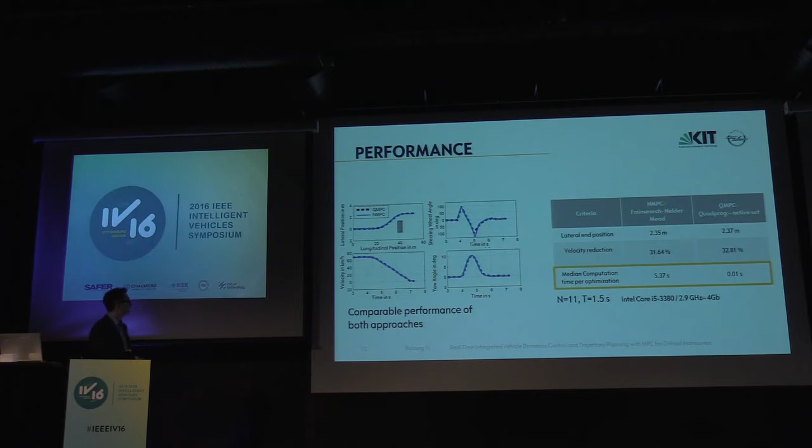For the ideal formulation MPC, we have 5 seconds per optimization step, which is not real-time applicable. And for the approximative MPC, we have 10 milliseconds with the hardware I gave here. So this is only simulation here. Next step we are about to do this in real time on a test vehicle, but I have not prepared results here. So now I prepared some videos to demonstrate the performance in a simulation environment.

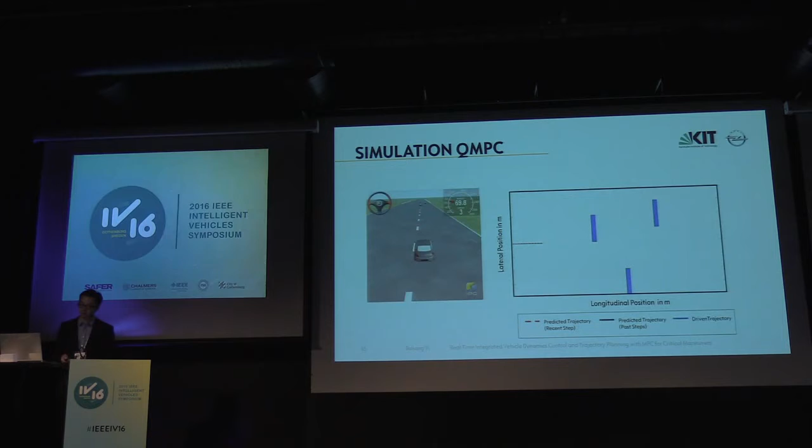We can see that we try to brake the system to zero velocity, and I hope you saw this obstacle also. And then I have another video prepared where I extended this algorithm for another scenario where we have 3 obstacles, and this example is just to show that we can extend this algorithm very easily for other maneuvers. In this maneuver, I removed the velocity cost function so that it does not brake.

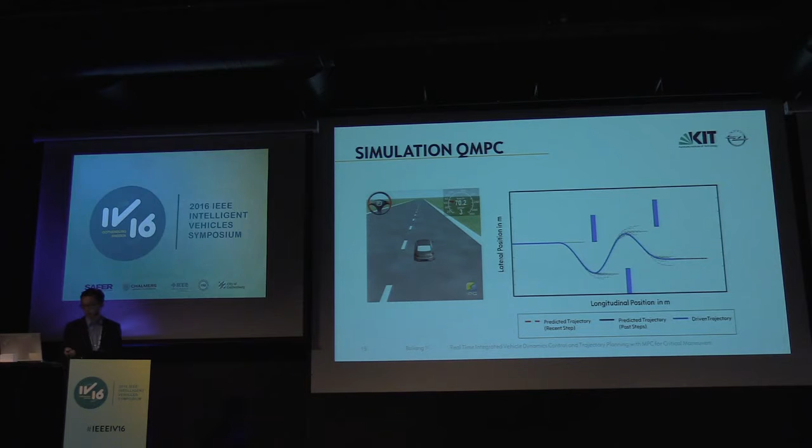And we can see that here on the right we have the predicted trajectories for each position, for each time step, and the driven trajectory, as well as the predicted trajectory for each previous step. We see that at the time when the prediction horizon gets a new obstacle, we replan the trajectory and catch another trajectory, so that we can handle dynamic scenarios, which was one of the motivations of integrated control and planning.

Now coming to my last slide, what I have shown here is a method for integrated vehicle dynamics control and trajectory planning by combined braking and steering. I showed two versions of it. First, the ideal MPC formulation with non-linear optimization, where the advantage was to generate trajectories considering vehicle dynamics, which is able to adapt to dynamic scenarios during the maneuver. We have less tuning of control parameters.

And the next version I showed, this approximative MPC, where I showed how we can do this with comparable performance, but with extremely reduced computational cost. And it shows potential for real-time application. The next steps are to apply it in a test vehicle and to show that it's really real-time applicable, and also to compare it with the classical state-of-the-art trajectory planning and control concepts, and see how it compares.

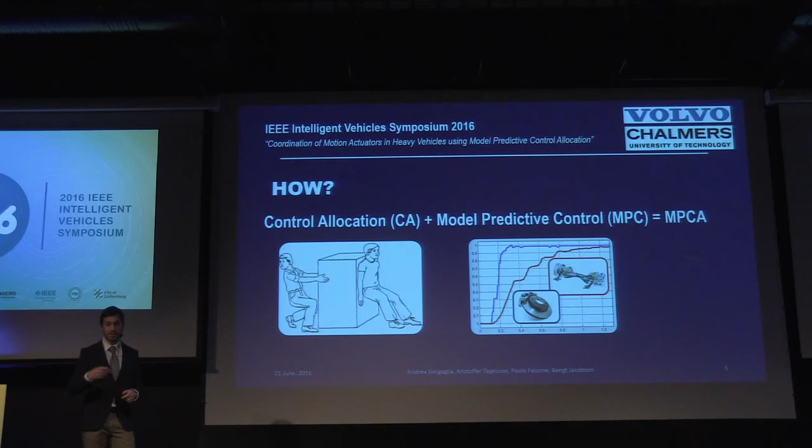As we want to control different motion actuators, we have to include the dynamics of the actuators in the control, and so we borrowed an idea from model predictive control. That is, we introduced a model for each one of the actuators in the control allocation formulation, in the constraints in particular, and we added a time horizon in the cost function.

Regarding tests, we used the dSPACE suite to transfer the controller from Simulink to a prototype ECU, a MicroAutoBox 2. As vehicle, we used a Volvo FMX at the Hällered Volvo test track for the test sessions.

To evaluate the performance of the controller, we set up 3 different scenarios: a braking event on an asymmetric road, an acceleration from standstill on an asymmetric road, and a braking event on a normal road that blends the use of disc brakes with engine brake. Among these scenarios, the last 2 were only simulated, while for the first one we made both simulations and tests.

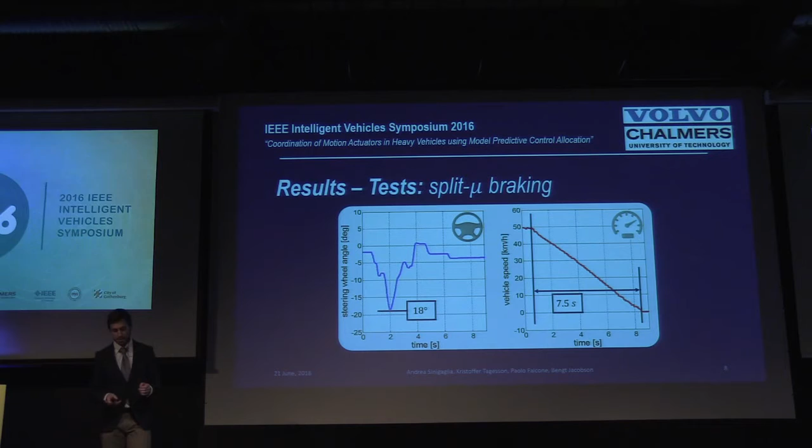As you can see in the graphs, on the left the steering wheel angle during time, on the right the vehicle speed during time. The vehicle stopped in a reasonable time without asking any demanding intervention of the driver. It has to be said that in all the simulations and tests, the priority was to avoid yaw disturbances in the vehicle, and this affected a little the stopping distance of the vehicle, but this trade-off can actually be dynamically adjusted during the computation, so you can decide which is more important.

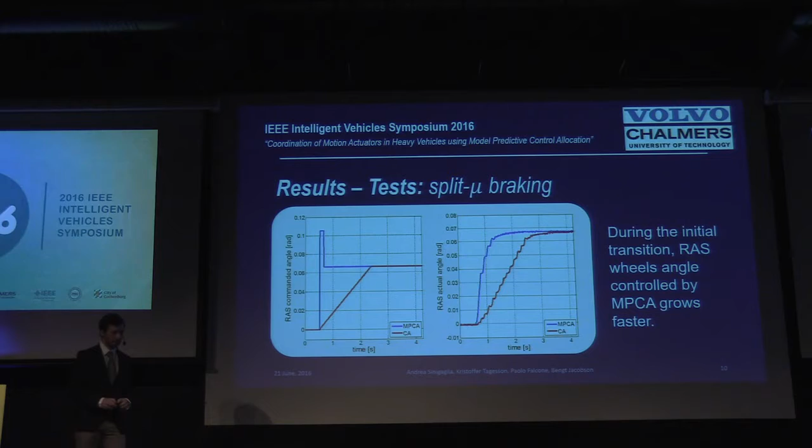Because control allocation does not have an explicit model of the actuators, some rate constraints have to be set in order to have at each time step the actual output of the actuators as close as possible to the commanded input. As a consequence, the rear axle steering wheels take more time to reach their steady state value. As a further consequence, the brakes have to wait a little more before they can reach the steady state value.

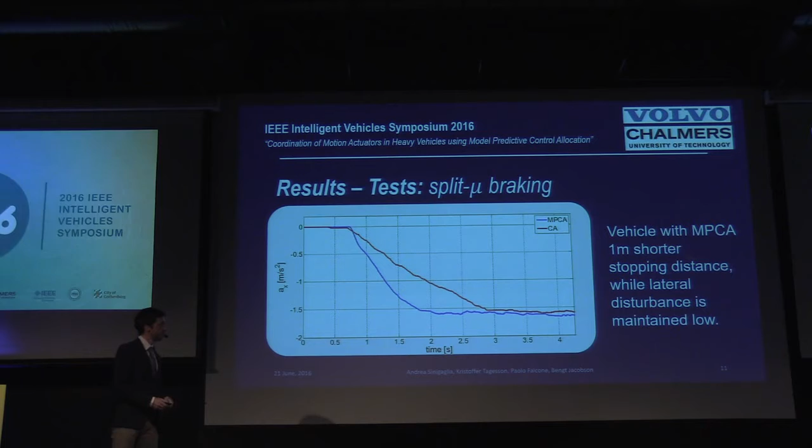And here you can see the acceleration of the vehicle during time. The vehicle during the initial transitions takes more time to reach the desired deceleration. We performed various sessions, and actually this was repeatable, so it was proved to be like that.

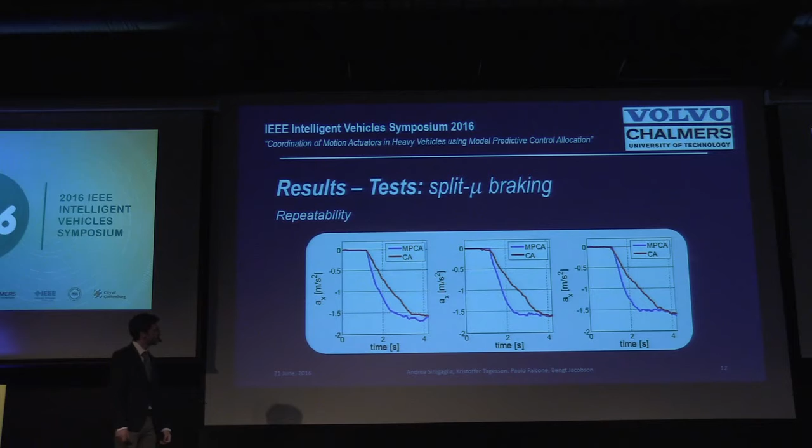I would like to conclude and sum up. So today I've introduced the importance of having a coordinator in a vehicle. I introduced a method called model predictive control allocation compared with another method called control allocation. Both methods perform fine in the sense that both do what is expected by the developer. And maybe it was not clear from the presentation, but both methods are very scalable, and they can be adjusted to many different vehicle configurations.

When compared with each other, model predictive control allocation can fully exploit the actuators, and so it performs better during transitions. This comes at a cost, that is a higher computational time to solve the optimization problem at each step. That is actually an advantage of the control allocation method.

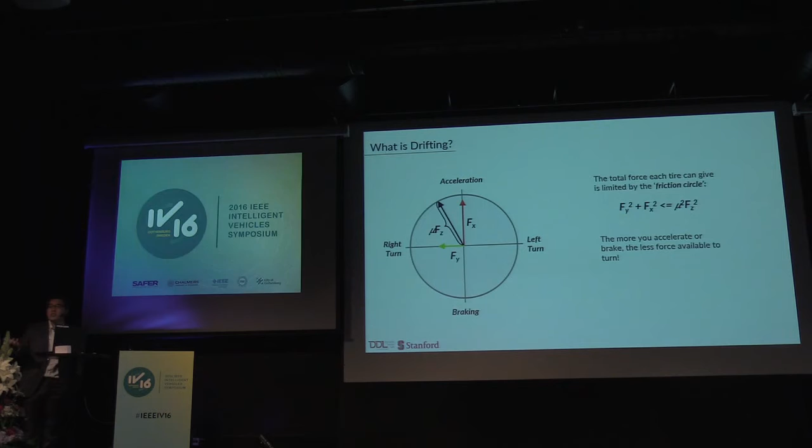So what exactly is drifting from a more formal vehicle dynamics perspective? Like a lot of interesting car phenomena, this actually comes about because all maneuvers that a car does are going to be limited by the amount of friction available. One very simple model for this is the friction circle, which simply states that the vector sum of lateral and longitudinal force on a given tire is going to be limited by mu times Fz, the normal load on the tire. So the more you accelerate or brake, the less force you have available to do any turning with.

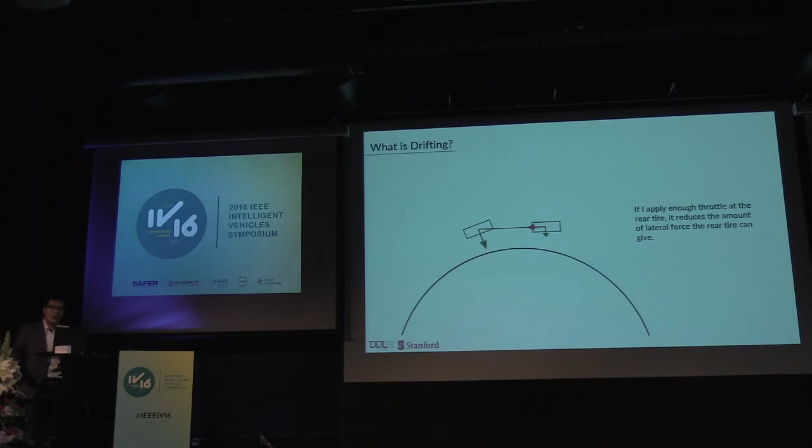When you're going around the turn, the tires are generating lateral forces that keep you on that turn. And if I apply enough throttle to the rear tire, it reduces the amount of lateral force the rear tire can give. And if I really just push the throttle down, the car starts to spin. It is now unstable and will continue to spin out unless corrective input is applied. This is the open loop unstable region we talked about earlier. So drifting then is actually the art of balancing this unstable equilibrium while trying to track a path at the same time.

So now that we know a little bit about what drifting is, we can start to look at some controller design. I won't go into too many of the mathematical details here, but I want to try and capture the major takeaways. So the first interesting thing has to do with inputs while you're drifting. It's actually quite different from normal driving. Steering is the same. We still control the front lateral force by using steering.

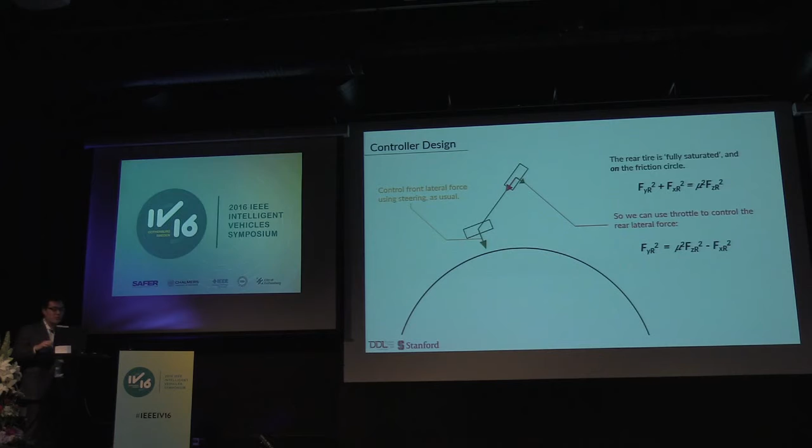However, because the rear tire is now fully saturated, it is on the friction circle itself, which means we can actually take this constraint and invert it, and now have a direct mapping from throttle to the rear lateral force. This actually, I think, is a pretty interesting point in and of itself. Your rear lateral force is no longer a complex, nonlinear function of your tire model and your vehicle states, but something you can control directly. So that's pretty cool. The other interesting thing, in my opinion, is our choice of control objectives.

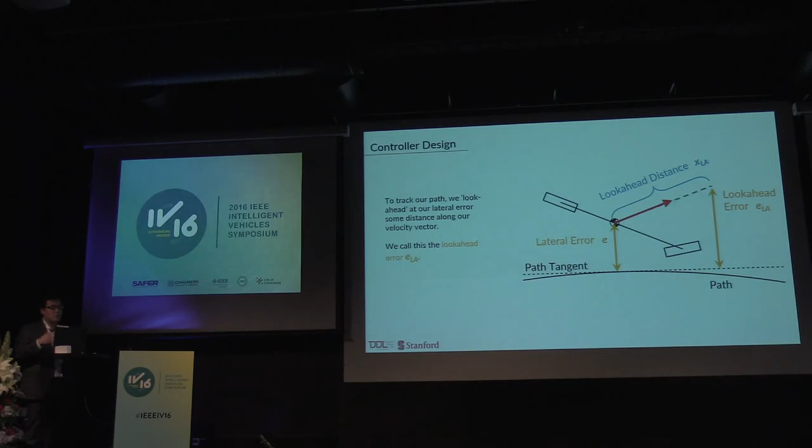In order to track the path, we use the look-ahead error, which is the lateral error from the path tangent of the vehicle, propagated some distance forward along the car's velocity vector. This is akin to a weighted sum of the lateral error and the lateral error derivative, so it's basically PD control, but represented in perhaps a more physically meaningful way.

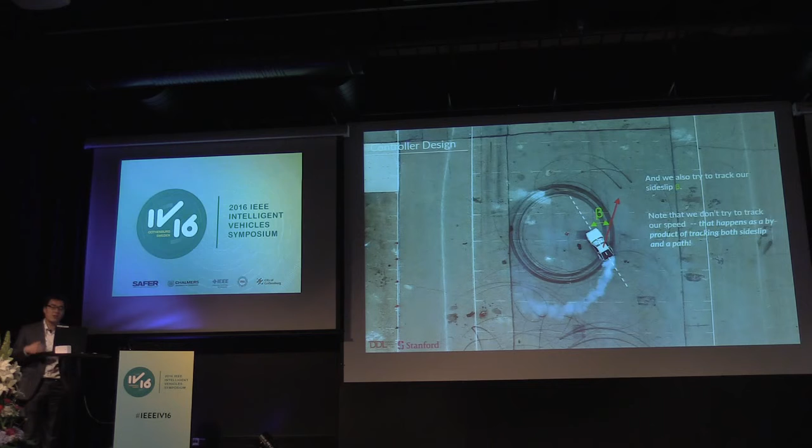The other objective we're trying to track is the side slip beta. This is also the final objective we're trying to track. So this might be alarming to some of you that we're not trying to track speed at all, but I want to assure you that this actually will happen as a byproduct of tracking both the side slip and a path. So now we have our inputs and we have the objectives we want to accomplish.

We can try and create a controller by very simply imposing stable first order dynamics. We use a simple two-wheel bicycle model and a brush tire friction model as our vehicle model. And the resultant controller actually has a very simple form. You use the total front and rear lateral force, FYF and FYR, to accomplish your path tracking objective. And you use the difference between the front and rear lateral force to track side slip. And this difference is akin to a yaw balance on the car.

This has two equations and two unknowns, and we can solve for a unique FYF and FYR value. And then we can map the front lateral force to steering by inverting our tire friction model. And we can invert the rear lateral force into a throttle input based on our friction circle.

This actually means that steering and throttle must be precisely coordinated to simultaneously track both the path and side slip while you're drifting. This is quite different from normal driving, where we often assume decoupled dynamics, where we can use the steering to track the path and use the throttle to track the speed, and do those independently of each other.

Specifically, when you're drifting, as you steer out of a turn and you're trying to increase the turn radius, you actually need to also apply more throttle in order to keep the car balanced. And when you steer into a turn or reduce your turn radius, you have to reduce your throttle input to keep the car balanced. This can create some, I think, somewhat counterintuitive situations.

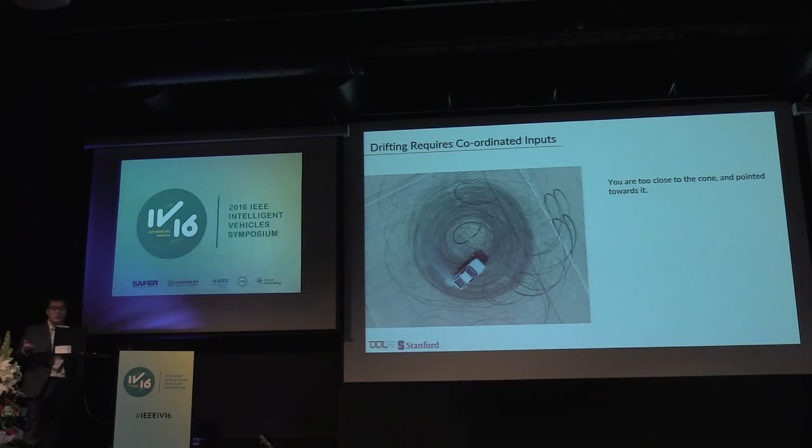For example, pretend you're the driver of this car right here. Right now you're too close to the cone and you're pointed straight towards it. Your instinct might be to steer away and probably also lift off the throttle so you don't head towards the cone. However, if you did that, you would just spin out. And the right answer is actually to apply more throttle while you steer away. So I think this is pretty counterintuitive, to be looking at the thing that you don't want to hit and also have to apply more throttle. So I think this is something that a naive controller, or indeed a naive driver, would have some difficulty with.

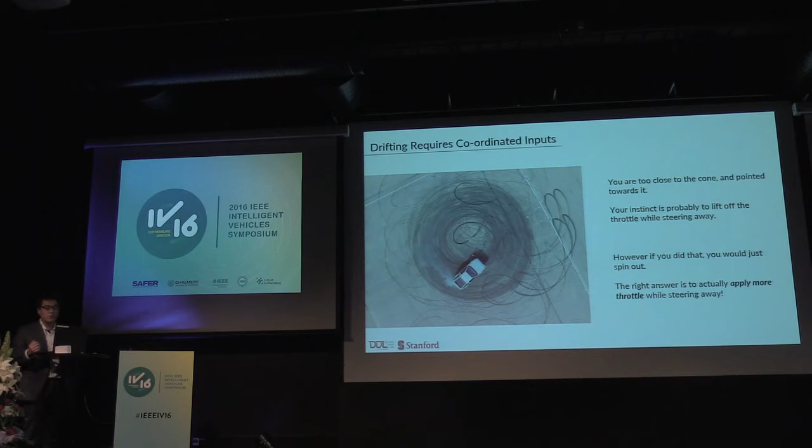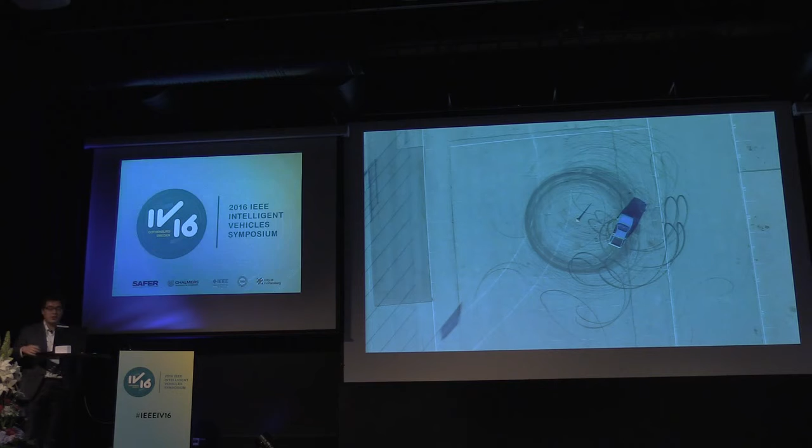Now the part that everyone's waiting for, experimental results. So I'm going to show you this video of a test. The first part of the test is going to be autonomous, very basic circle driving. And then the drift controller is going to be turned on. And the reference trajectory here is a simple circle. And the side slip demand will ramp from 0 to 45 degrees, somewhat slowly. And then we'll stay at 45 degrees for the duration of the test until we manually stop it.

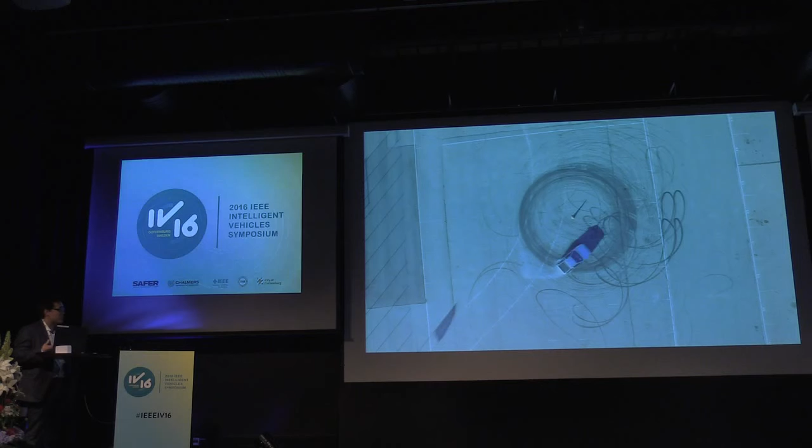So as the car starts to become more sideways, you can see copious amounts of tire smoke start to develop. You can see more and more tire marks begin to lay down on the test surface. And as you can tell, we did this test a couple of times here.

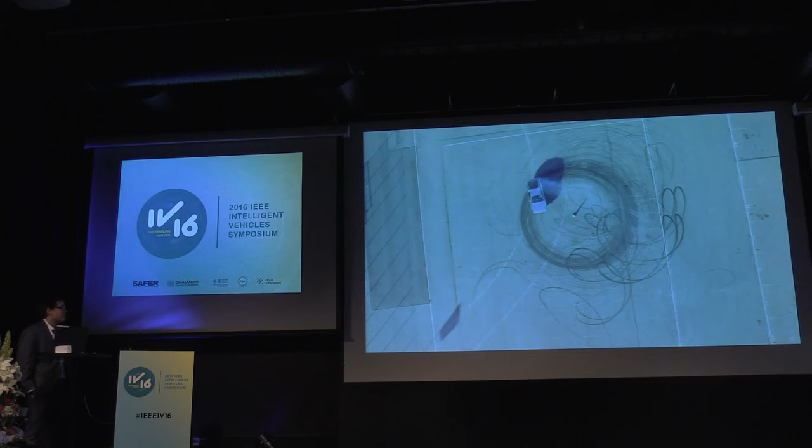It's a good test of whether we feel sick first or the tires pop.

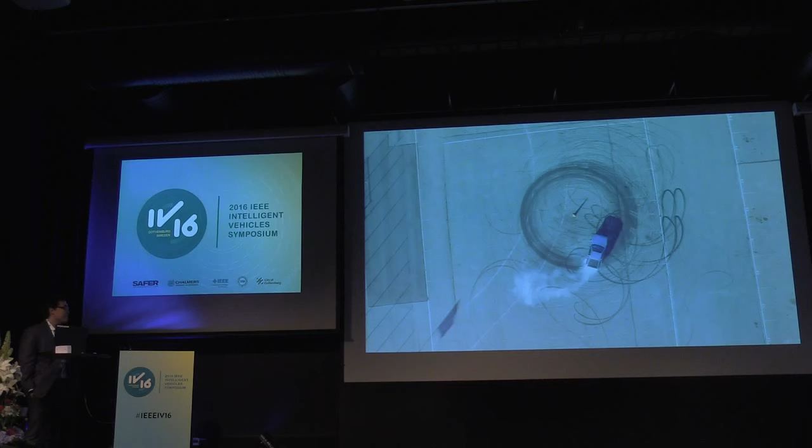Alright, so early on in the presentation, I used tire squeal as a metric for how extreme a maneuver was. I'm just going to bookend that extreme end of the scale by showing you a little clip with audio.

So as you can hear, the tire is working pretty hard. You can also see the smoke swinging off the tire, which is also a good indicator that it's being well used. You can also notice the cone is actually quite stable in this video frame as well.

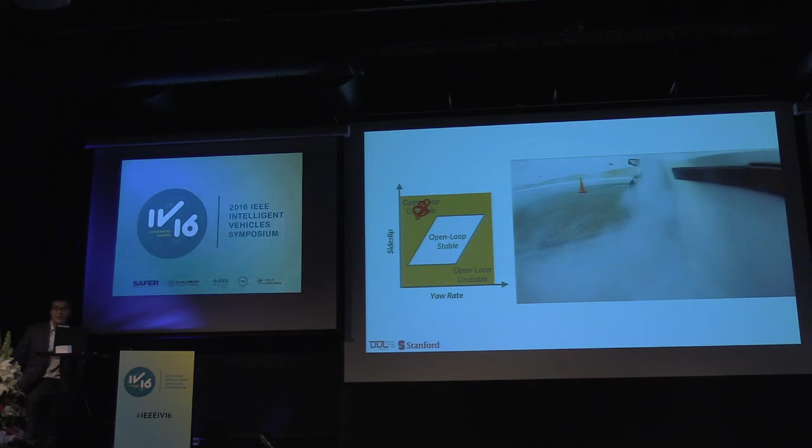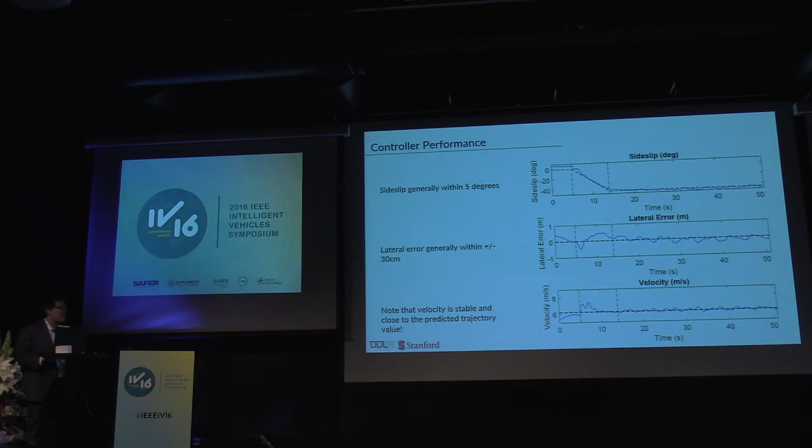Cool. So early on in the presentation, I promised that being able to drift would allow an autonomous vehicle to do maneuvers it otherwise might not be able to. So in this example here, it might be a little bit contrived, but here we're going to ask the car to actually perform a turn that's smaller than its minimum turn radius as defined by steering angle limits. So it's going to start at a slightly wider radius and then be asked to spiral in towards the cone while increasing its side slip to about 45 degrees, and then drive around the cone for a little bit and then spiral out while reducing its side slip. And then we stop the test. I want to note that we actually moved the cone from previous testing because we hit it a couple times.

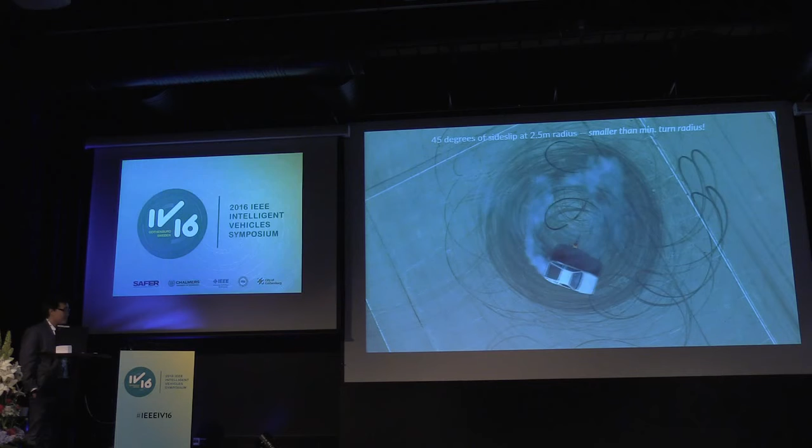So having tried to do that maneuver, I can tell you it's quite hard by sort of manual operation. All right, so maybe a little bit of a contrived example, but also that's all I need really for an existence proof that being able to understand the dynamics and control of drifting would allow us to expand the safe operating envelope of autonomous vehicles. I think we've made a small step towards that. We've demonstrated some tracking and stabilization and actually path generation as well for some very basic trajectories.

Moving forward, I think we need to look a little bit more at the feasibility and planning of more complex trajectories. And also thinking more about the control during the transition region between normal driving and drifting, which is especially important for its applications to vehicle safety.

Did you have a sensor to detect the position of the cone? No, so we actually use RTK GPS for all our positioning and for all our dynamic rates. We actually put the cone there, and then we drive up to it until the bumper hits the cone, and then we calculate what the GPS position of the bumper is, and we enter that into ControlDesk, and that's the center of the circle.

And then we do a test. That way, it's really easy just to set up the test and move around to different test sites as the day evolves. Because oftentimes we need new tarmac where someone else needs to use one part of the test site.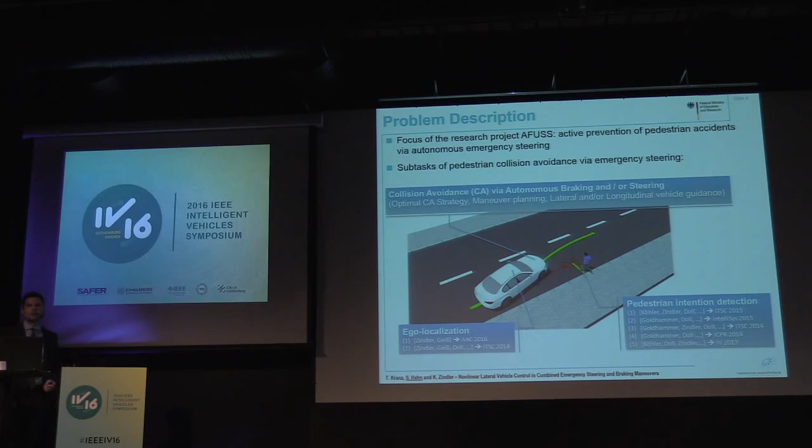And this is the main focus of the research project AFUSS, which is funded by the German Federal Ministry of Education and Research. AFUSS comprises three main components. First of all, we detect the pedestrian's intention to cross the street, and by means of this, we detect a critical traffic situation. After that, we determine the optimal collision avoidance strategy, also by means of the localization of the vehicle within its own lane. After that, by means of lateral and longitudinal control concepts, we avoid the collision via autonomous braking and steering. And the focus of my presentation today is on the third component.

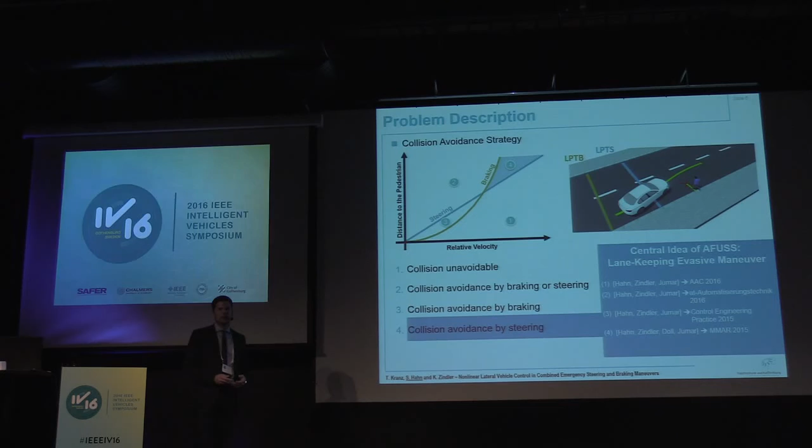You can see that the vehicle has passed the last point to brake, so the only possible reaction is now to steer. And this is also the central idea of AFUSS, where we want to ensure a lane-keeping evasive maneuver in such critical traffic situations.

Moreover, there is also a fifth area, which comprises the traffic situations which can only be defused by a combined steering and braking maneuver. You can see it here in the picture. The resulting last point to steer and brake is the nearest point to the pedestrian. So our main objective is now to develop a control system for combined emergency steering and braking, and today I want to focus on the lateral vehicle control system for these scenarios.

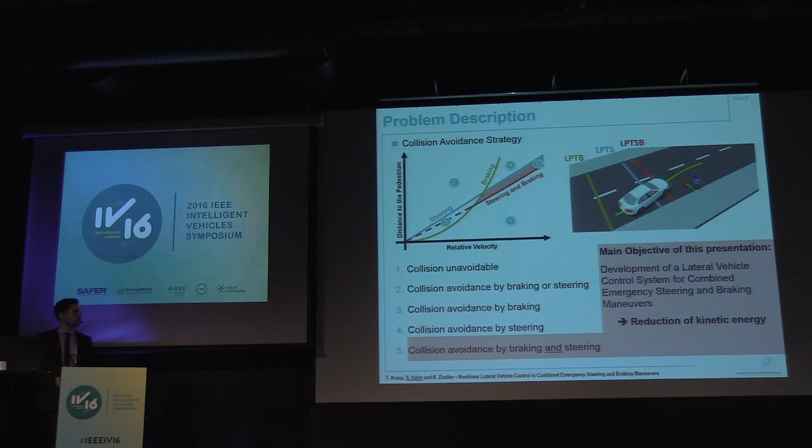And please keep in mind that even if the collision could not be avoided by such a maneuver, we reduce the kinetic energy of the vehicle significantly. So we also significantly mitigate the injury severity.

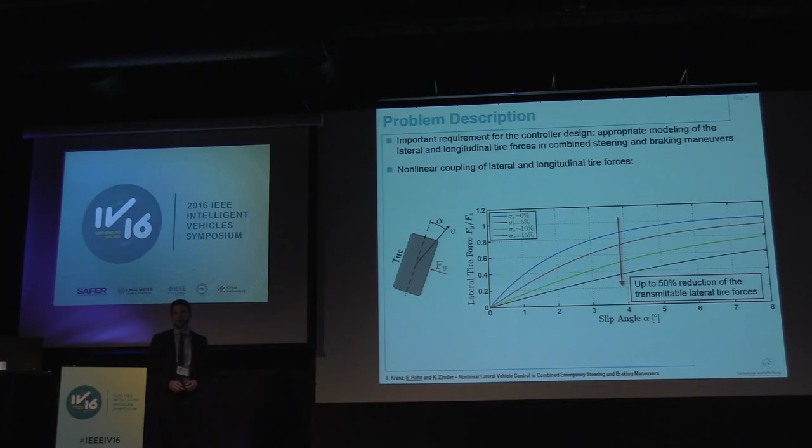So our main objective is, as I said before, to develop a lateral vehicle controller, especially for these combined emergency steering and braking maneuvers. To do this, we derived a new vehicle model, including a nonlinear combined tire model, which takes into account this nonlinear coupling. And based on this model, we designed a path-following controller using the method of input-output linearization, and we also adapted this controller to the present class of nonlinear system, a nonlinear control-affine system with time-varying parameters.

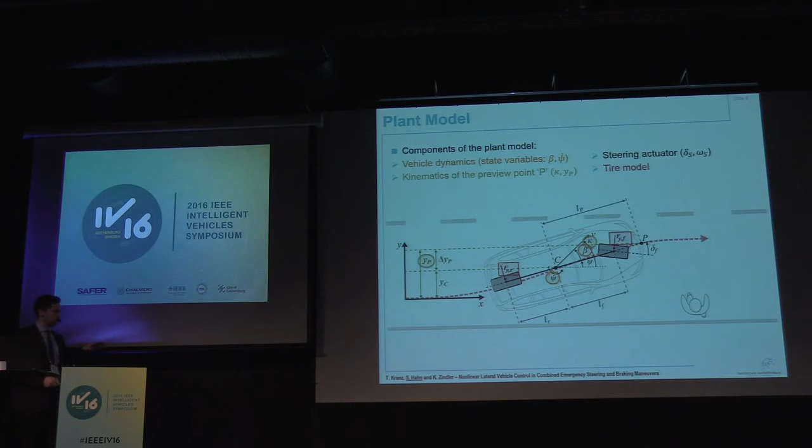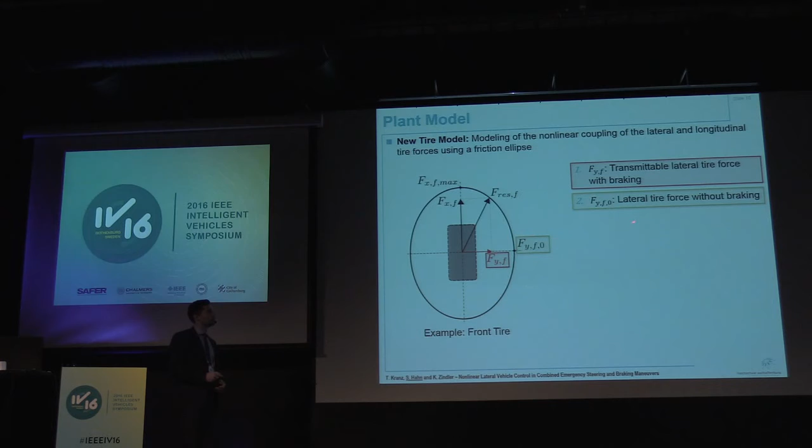The main objective of modeling the tire forces is to find an equation to calculate the transmittable tire forces in case of braking. We propose to use the friction ellipse depicted on this slide. The semi-minor axis of the friction ellipse corresponds to the lateral tire force without braking, whereas the semi-major axis length of the ellipse corresponds to the maximal transmittable longitudinal tire forces. And as can be seen, in case of braking, a current longitudinal tire force is transmitted, and this leads to a reduction of our lateral tire force. This correlation can be calculated by means of the equation of an ellipse.

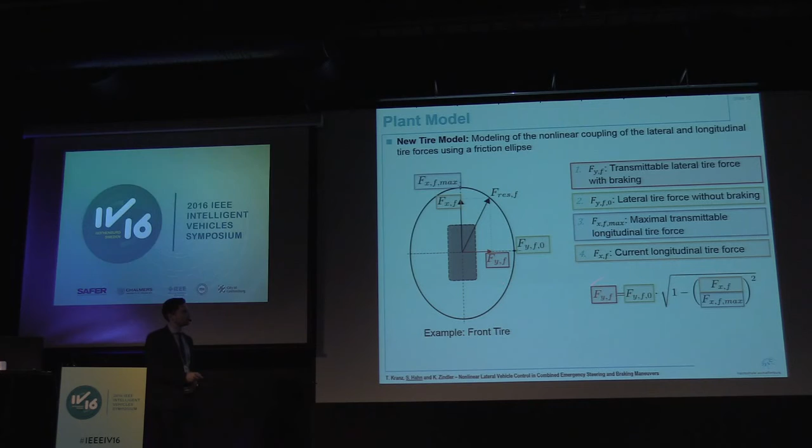On the next slide, I want to focus on the calculation of the lateral tire force without braking. If you're interested in the calculation of the other tire forces, I invite you to the poster session after lunch.

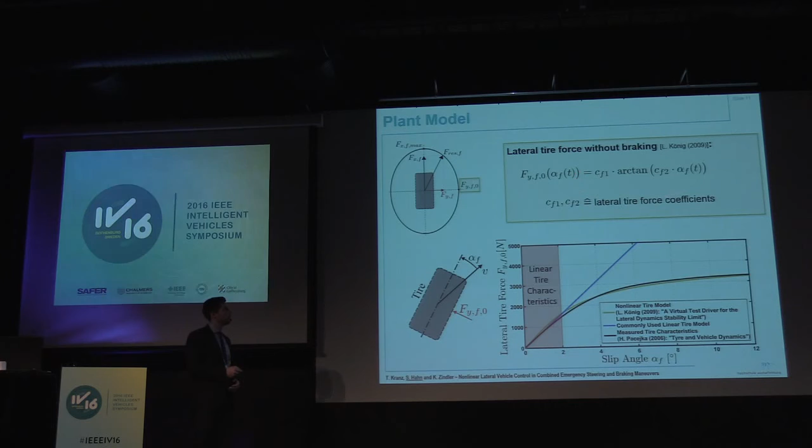And please note that by modeling the lateral tire force without braking by means of this arctangent approximation, we've got only the dependency on the slip angle, as well as only two further lateral tire parameter coefficients. So at the end, we achieve a plant model of 6th order, which is highly nonlinear due to the new tire model. It's time invariant.

It's time variant and has, of course, the time variant model parameters velocity as well as acceleration. It's minimal phase, unstable, has a relative degree of 4, and is controller free. So, based on this model, we designed a follow-up controller via the method of input-output linearization.

The design of this controller via input-output linearization can be divided into 4 main steps. The first step comprises the transformation of the plant model into the Byrnes-Isidori normal form, and by means of this we obtain the new state vector z. The second step comprises the design of the nonlinear feedback controller to compensate for the nonlinearities of the external dynamics and to decouple the internal dynamics.

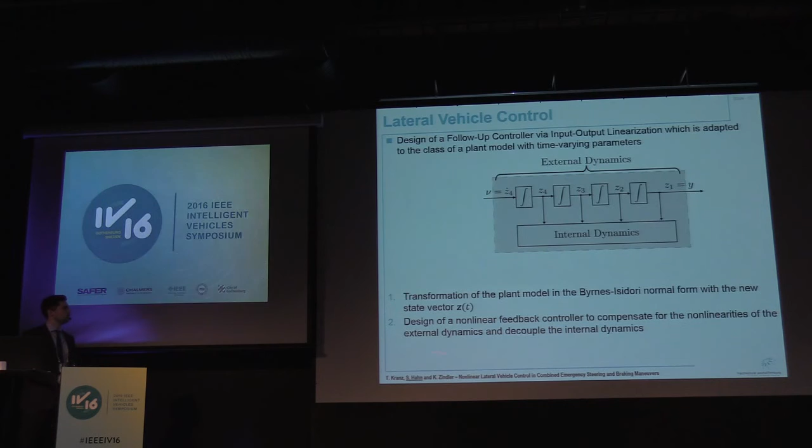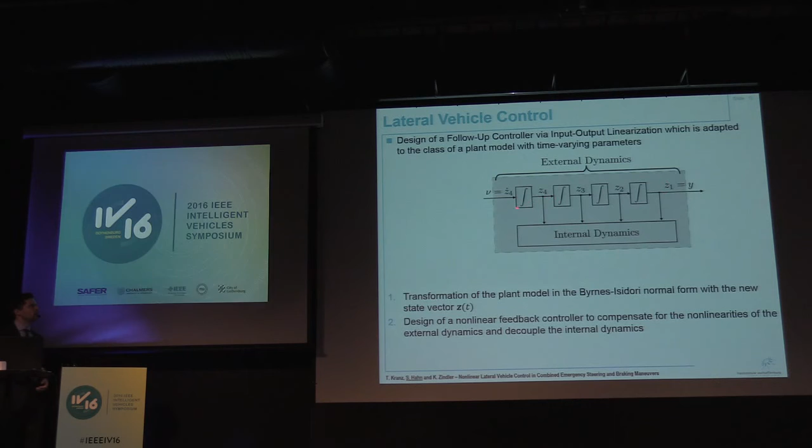As a result of these 2 steps, we obtain the input-output behavior depicted here in the graphic. So we obtain a linearized input-output behavior. We achieve an integrator chain of the order of the relative degree of the system, and here it's the order 4. So in the next step, we superimpose a linear state controller in order to stabilize the plant and furthermore to impose a desired closed loop dynamics.

The fourth and last step comprises the application of a pre-filter, which takes into account 4 time derivatives of the set value W. And so by means of the last step, we achieve a really precise track guidance. So now let's have a look at the experimental results.

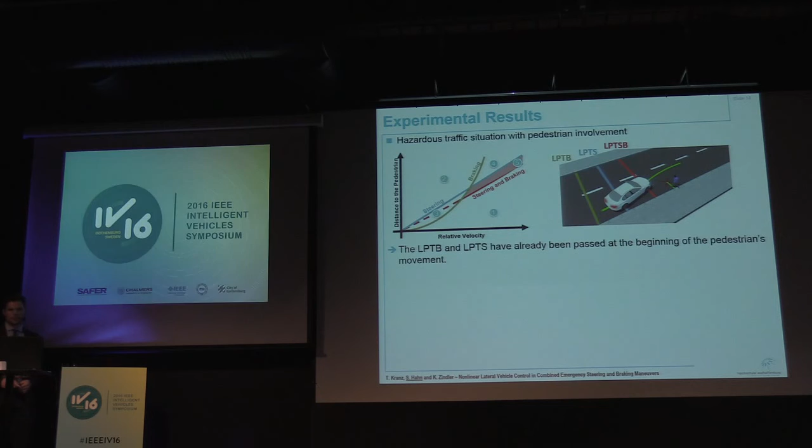For proving our developed controller, we replicated a hazardous traffic situation with pedestrian involvement on the proving ground, which can only be defused by a combined steering and braking maneuver. As can be seen here in the graphic, the last point to brake as well as the last point to steer were already passed. In order to evaluate the relevance of our autonomous collision avoidance system, we first conducted a case study to analyze the normal driver's reaction.

I'm going to show on the next slide 2 videos according to this. The drivers were acoustically as well as optically warned at the beginning of the pedestrian's movement. The first scenario illustrates the reaction of an unprepared driver. Afterwards I'm going to show a scenario where the drivers were prepared and instructed to avoid the collision by steering and braking.

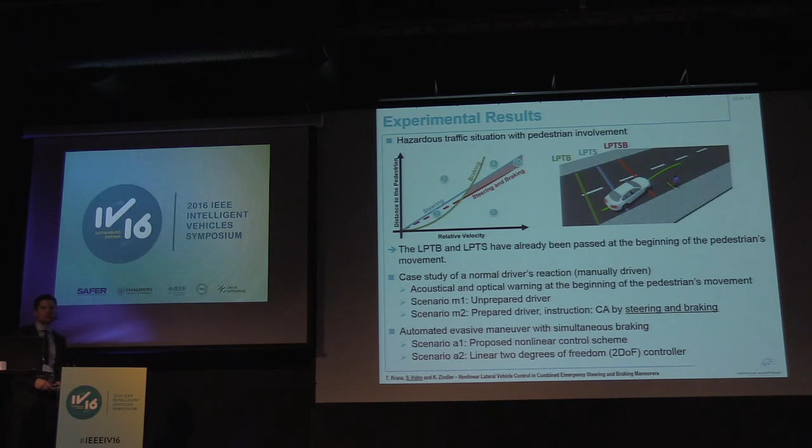Afterwards I'm going to present the results of an automated evasive maneuver with simultaneous braking. I'm going to present our proposed nonlinear control scheme and compare the results to a linear 2 degrees of freedom controller, which represents the state of the art. Okay, now let's have a look.

The video shows the reaction of an unprepared driver. I have to say, most drivers didn't show any reaction. And in case of showing a reaction, most of them initiated a braking maneuver. The distance to the pedestrian was too short, so the collision could not be avoided by braking. So after that, we instructed the driver to avoid the collision by steering and braking.

However, the driver's reaction was either too weak, as can be seen, the collision could not be avoided, or, as can be seen here in the video, the reaction was too strong. So it was a really good driver. He avoided the collision. However, he endangered the oncoming traffic. He exceeded the center line.

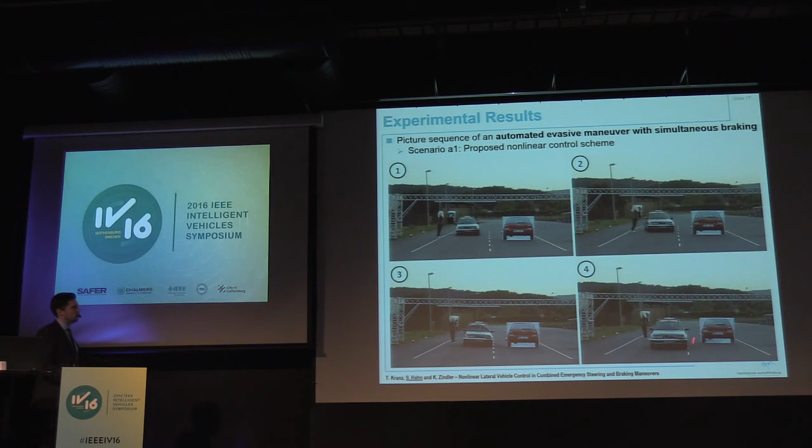And now let's have a look at our developed controller. You can see here in the picture sequence that on the one hand, we were able to avoid the collision with the dummy. And furthermore, we ensured a lane-keeping evasive maneuver. This is also proven by our measurement results. At the beginning of the maneuver, the velocity was 40 kilometers per hour. At the point in time of passing the dummy, the velocity was reduced to 25 kilometers per hour. And at the end of the maneuver, we did not exceed the center line.

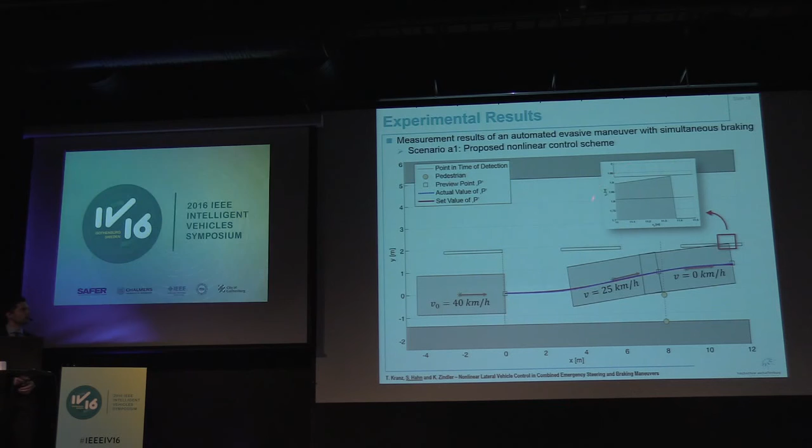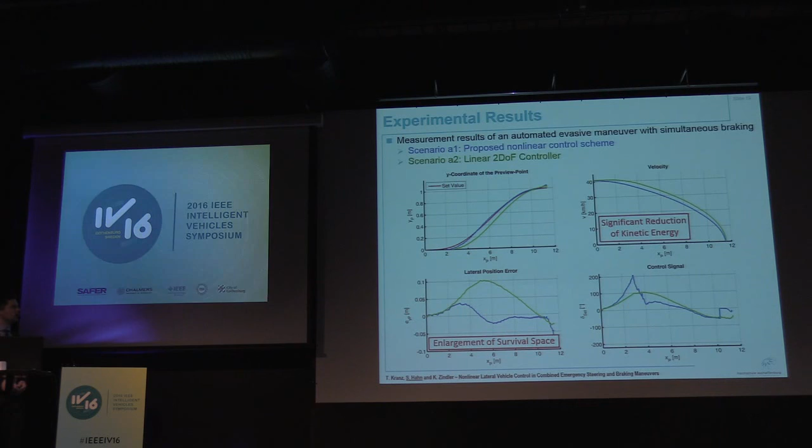However, it can be stated that in both cases we reduced the kinetic energy significantly, and so, of course, injury mitigation was achieved. We also have to state that by means of our new lateral controller, we achieved the enlargement of survival space.

Okay, so now let's conclude. We developed a new lateral control scheme for the lateral vehicle guidance in combined emergency steering and braking maneuvers. To this, we derived a new vehicle model, including a nonlinear combined lateral and longitudinal tire model. And on basis of this model, we designed a follow-up controller using the method of input-output linearization.

And the experimental results demonstrated that by means of our controller, further pedestrian collisions can be avoided. The focus of current research is now to implement our developed control scheme in our new research vehicle, and to this we want to adapt the control scheme to a car with series production sensors and actuators.

And furthermore, we want to develop an optimal collision avoidance strategy via automated steering and braking. That means we want to include also the nonlinear coupling of the lateral and longitudinal tire forces in the path planning.

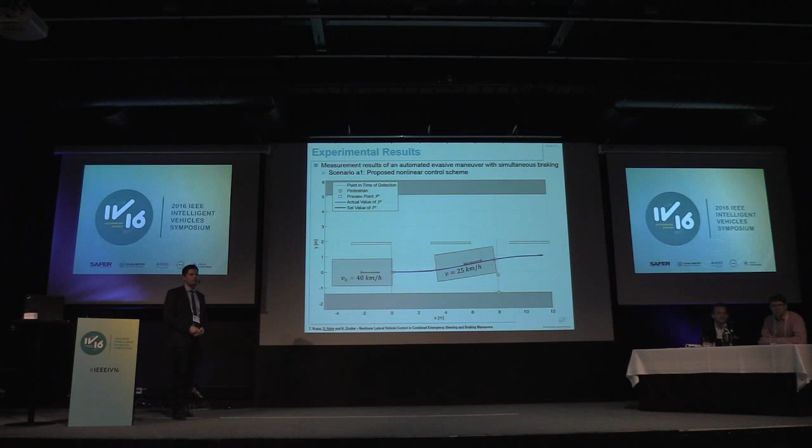But I guess in such a scenario, longitudinal dynamics is also quite critical, especially the delay of the actuator. You need to take it into account. That's right, and that's now the focus of current research. We want to develop an optimal collision avoidance strategy, and that means we want to plan a trajectory comprising the dynamic limitations also of our longitudinal actuators, and so we decouple the plant models a little bit by means of our trajectory planning.

And that brings my second question. If we design a controller, we need to set the control objective. In your scheme, what is your control objective? You track a reference or stabilize your vehicle? Our main objective is to guide the y-coordinate of the preview point along a set value, along a predefined path. Okay, to track a predefined trajectory. Yes. And the path is calculated in real time in case of detecting the dummy, or better said, in case of detecting a critical situation.